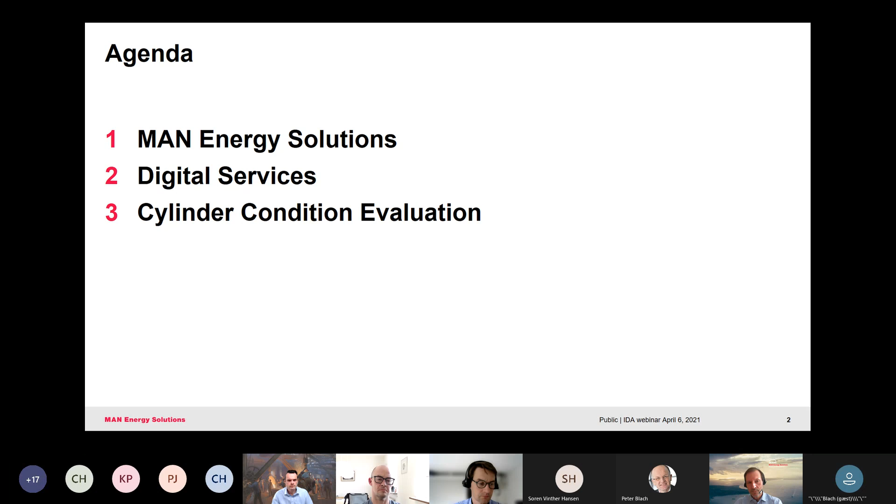A little bit about MAN for those who don't know us. We've been in the game of providing technology to the industry for more than 250 years. We're headquartered in Augsburg, Germany, and roughly 14,000 people are hired across 120 sites globally. Our products are divided into three main business areas, where we have the engines and the marine systems as the one where Jesper and I are representing here. Then we have the power plant business, and then the turbo machinery business, which delivers equipment for the process industry.

On the bottom part, we see just this.

To support all these three business units, we have the after sales brand, which is called MAN PrimeServ, which is the supporting part for all the activities with the equipment that these three business units put into the market.

Now, if we look at our company strategy, two of the 4 or 5 pillars we are building our company strategy on are decarbonization and digitalization. These are, you can say, the new additions to the strategy over the last 5 years.

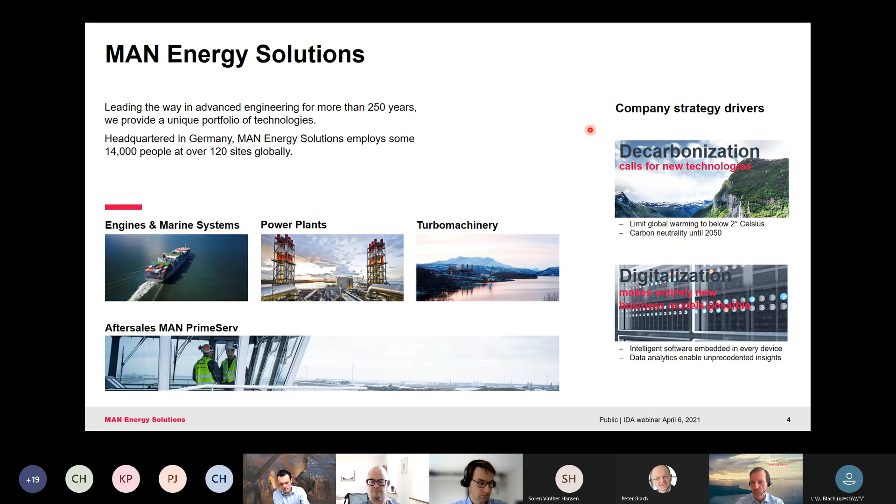A little map here, a lot of stuff is going on, but we are trying to explain what is going on in the maintenance journey that a typical ship owner or plant operator will experience in the lifetime of running some equipment. And it goes like this: there is a kind of problem or issue with the equipment on board a vessel, for instance, a problem with the engine.

Somebody detects that there is such a problem occurring. Then you need to issue some kind of notification to get to some people to actually figure out what the problem is, and then start an investigation into how we should actually solve that problem, and then advise some kind of action.

And then in step 5, our customer is able to prepare what kind of overhaul should happen on board the vessel, and then in the end make a report and a sign off when the problem has been fixed.

The service that we are talking about, the MAN PrimeServ Assist service, covers everything from when an issue is detected until we have advised the customer with an action.

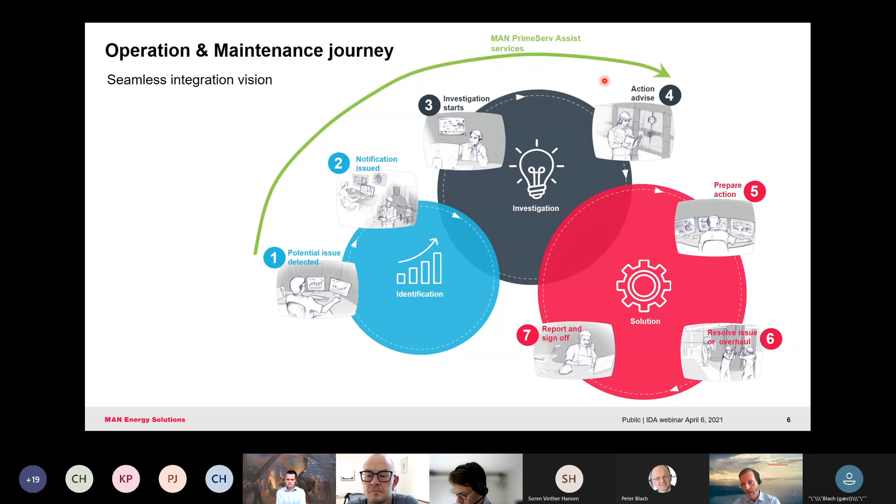The PrimeServ Assist service solution consists of 3 elements. We have the data infrastructure, which is the MAN CEON platform and subsequent user interface. Then we have some analytical tools that run on this in the cloud, which means some algorithms and machine learning. And last but not least, the human expertise, because it's not about big data.

It's about the combination of big data and human expertise. So here, what we do is we throw in the many years of experience we have with MAN, with developing the products and then subsequently servicing them. And this we do now on a 24/7 basis. So the customers who actually sign up for this service will get monitored 24/7. So these 3 elements, the platform, the analytics, and the human expertise, make up the PrimeServ Assist service portfolio.

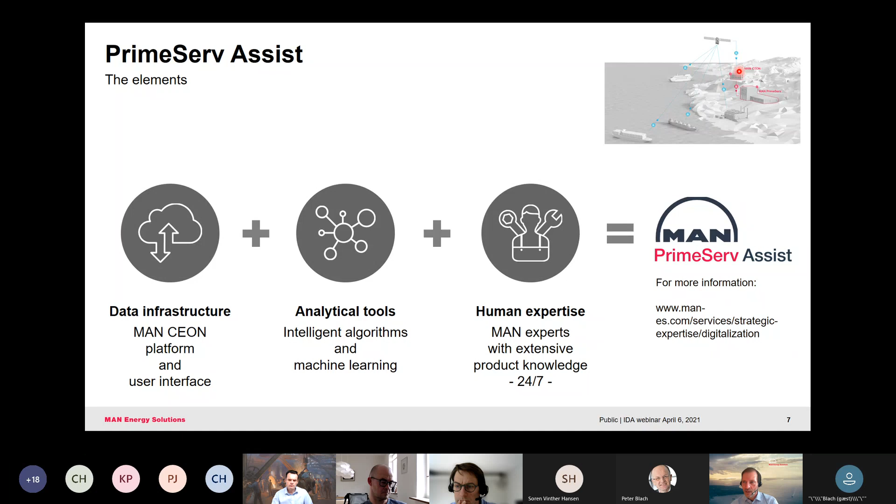There's a quick link here where you can find more information about that. Up in this corner, just a brief architectural overview, nothing much showing other than we are connecting the vessels via satellite to the cloud from where the data is accessible by MAN and by the customer and so forth.

Now, this service portfolio has 3 different focus areas. And the first focus area, and the main focus area as we could call it, is the availability focus. That is the day-to-day optimization of equipment health. And this part here relies 100% on sensor data, meaning sensors sitting on the engine in the vessel and then transmitted to the cloud.

The service will deliver monitoring and evaluation and subsequently advice on how to run the equipment and also how to judge the condition, for instance, the engine balance and if the settings are done correctly.

Now, the second focus area is on efficiency. This is a long-term optimization of power, emissions, consumptions, you name it, and again driven by sensor data. We can say it's the in-depth over time trending across systems, across fleets, and so on.

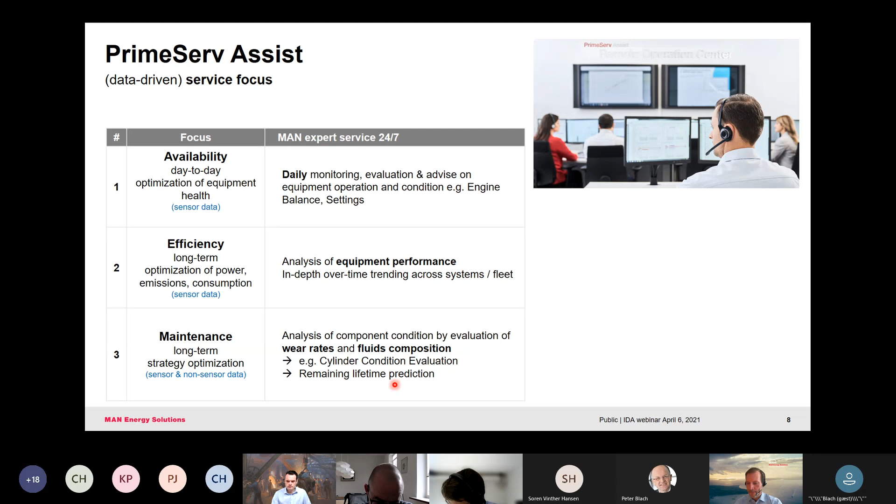Speaking about our goal, we can say we're solving customer problems. Right now we see a lot of environmental regulations pushing the industry for changes.

We see the shift from heavy fuel oil to very low sulfur fuels, combined with a new breed of high-performing, very efficient engine designs. These require much closer monitoring and much more technical knowledge to avoid unintended wear.

This wear often results in unplanned maintenance, and the larger the engine, the larger the problem, especially in terms of money. So at MAN, we are trying to create a proactive service that helps customers and operators reduce unplanned maintenance and keep their vessels available for the market.

We know that on board the vessel there is a tendency toward lacking knowledge on how to operate the engine. As explained, this can lead to damage to engines, unscheduled maintenance, high maintenance costs, and so on. It all calls for a solution.

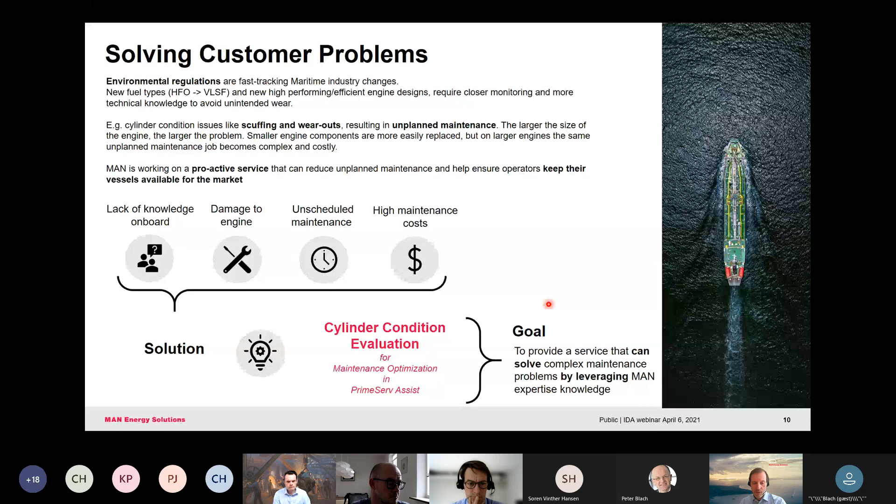In this case, the cylinder condition evaluation is our take at it. Our goal is simply to provide a service that can solve these very complex maintenance problems by leveraging the knowledge from our engineers.

My final slide here is to say, how will this service actually work? If we start in the upper right-hand corner, we have a customer who has signed up for this service. This customer will be alerted to take oil samples, wear measurements, or other types of observations.

When that kind of data is sampled and acquired, it will be uploaded into the CEON platform by the customer. It won't just be hand-typed into the database or cloud — we can also upload complete lab reports and so on.

Once it's in the platform, the algorithm together with the experts will review it and provide the customer with a status on how that drain oil or lube oil actually performed, along with advice giving meaningful insight into the problem.

The service doesn't stop there, because we can give plenty of advice to the customer, but if it's not understood clearly and not followed up by the crew, it's practically useless for the ship owner in the end. So we follow up by looking at the sensor data to see whether things have actually been followed.

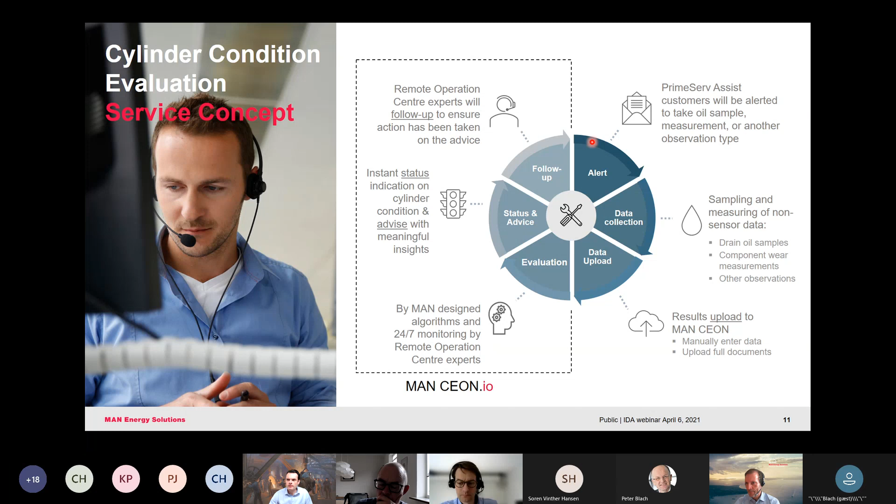Yep, I will take over the screen. Here we go — hope you're all seeing a different slide deck now. It's looking good. Yes, Jesper, thank you. Good, perfect. Then I will continue from here.

Thank you. As mentioned, my name is Jesper Mark Petersen. I am head of the cylinder condition group in the operation department in Copenhagen. That means in the operation department we take care of warranty on our newer engines, and extended warranties of the still pretty new engines.

We also do the R&D testing of new components, and we evaluate cylinder oil performance in general, as well as the issues at hand that need to be addressed for our future engines. So we are in the daily business in touch with whatever issues come up.

For this, we of course advise internally both instruction book departments, tooling, and other aspects that need to be addressed.

There is a lot of know-how involved in doing this. I've been dealing with it for 18 years, just with the cylinder condition, and we are still learning, still discovering new things. But there's definitely a lot that could be put into advices or into more intelligent aspects, and that's kind of the vision behind this.

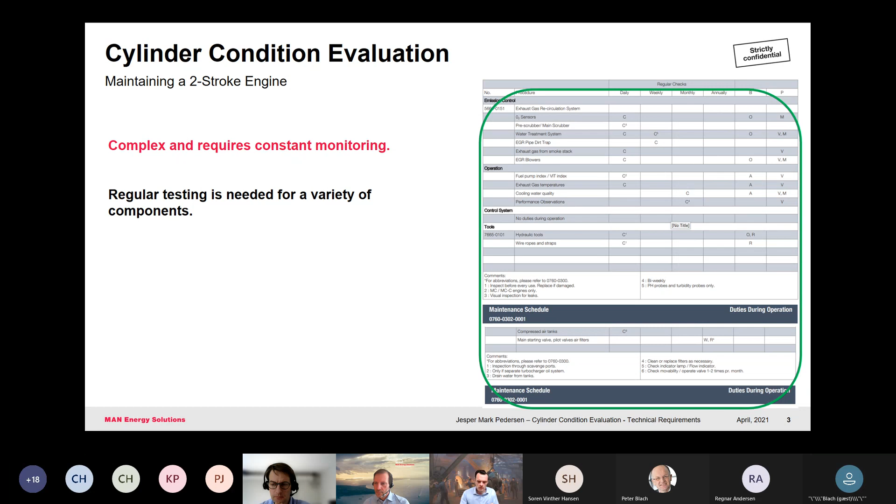The vision is that a lot of this knowledge data that we collect, for two-stroke engine advice and also for four-strokes, a lot of inspection is done in port, like scavenge port inspections and spare inspections. There is always a lot to do to maintain the engine, and these aspects are usually dealt with through crew experience or crew knowledge, with some guidelines from our side. That's one aspect not yet addressed in digital solutions, but it's what we want to combine into this feature with cylinder condition evaluation in maintenance.

So how do you do this? We have, as I said, a lot of instruction from our side. You've probably seen our instruction books and tables for monitoring. In addition, there are other features usually taken care of by oil companies, giving instructions on chemical composition of lube oils. How do you couple these things together? That's the big trick we want to assist operators in doing.

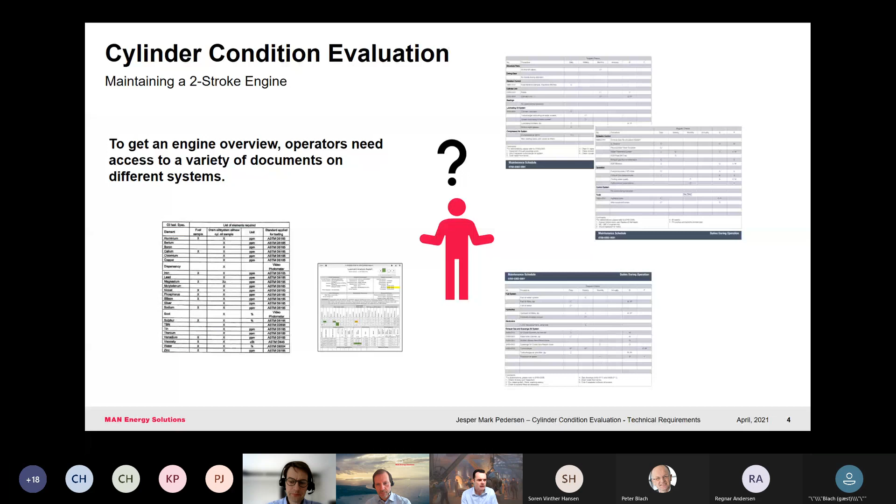For a given vessel, there will be issues related to the engine sets on the ship—could be auxiliary engines or the main engine—and in those aspects there could be connectivity aspects, drain oil aspects, maintenance aspects, or performance aspects. These could be put into categories to give an easy overview for operators to get fast and efficient transparency of how the fleet is doing.

So having this broad overview relies, of course, on the algorithms we have in the background to evaluate the data, which comes partly from sensors and partly from the crew itself when they're reporting their observations.

That aspect will assist superintendents and fleet managers ashore, but it will also have the possibility of going more in depth—looking at the SDA for a given engine, or running hours for individual cylinders on the main engine, looking at overall history to see how that single unit is actually doing.

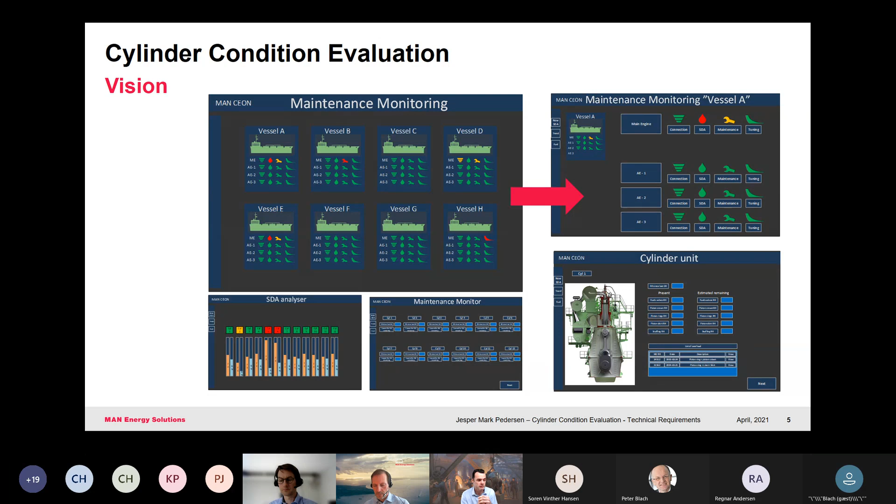An example here could be drain oil, which isn't overseen, but is something we use. We give minor guidance on drain oil values, but we don't give a complete overview of the different threshold values and their dependencies on different aspects. We have a lot of in-house knowledge—we've been using drain oil analysis for the past 20 years for R&D purposes, and we also use it quite a lot for warranty troubleshooting. So this is something we have a lot of in-house technology to assess.

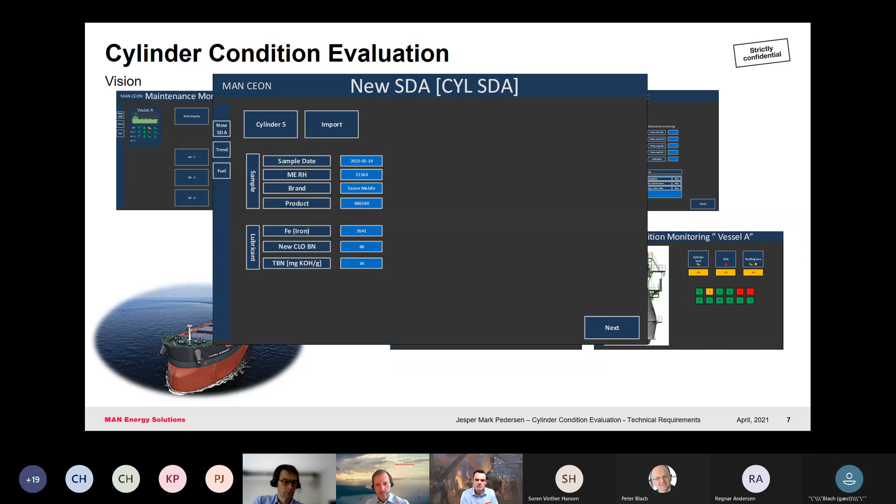The trick here is to bring it into a template where it will be feasible for the engine crew, so they can enter a simple set of data, and based on that entry, give them a timely alert with instructions on what to do next, how to prevent this from accelerating beyond their control.

We've had numerous cases with cold corrosion where the crew have been alerted by drain oil analysis from the oil companies. There were clear indications that the engine was going astray and that wear would go out of control, but still they do not react until they have broken piston rings. By then there's accelerated wear of liners of 1 to 2 millimeters or more, ending up with a loss of lifetime, more than halving the lifetime of the components, which is not to anybody's satisfaction.

We want to be more proactive and prevent this from happening in the future. We can do that by obtaining the service observations from the crew and linking it to our own guidelines and our own knowledge database.

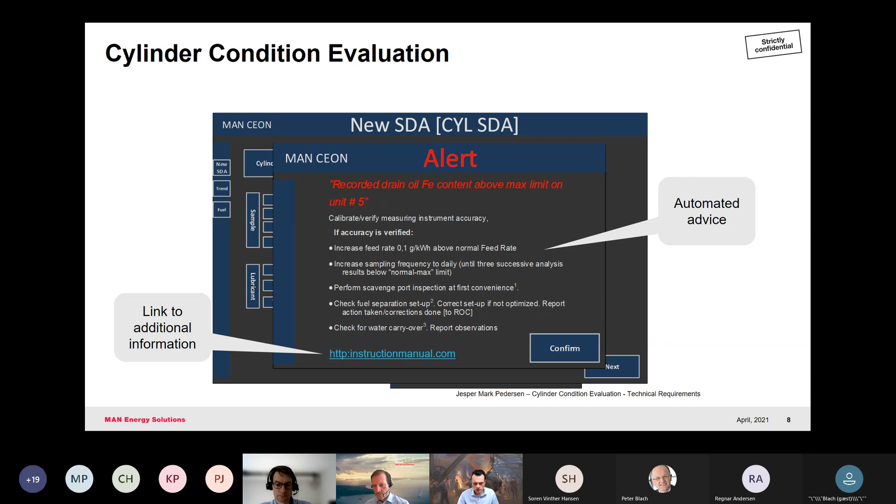This would rest on a number of cases. At the moment we are trying to mind-pick all our experts and put it into paper. What should be the thresholds? What are the conditions? What are the connections between copper, chrome, iron values? How do you link this to running hours, etc.? So getting all this knowledge in place, there could be repeats of certain events we need to include. Once we have the basics in, this is what we will do first.

Then we will work into machine learning, where we can collect the data coming from the ships, and by that we'll be able to give even better advice, based on our knowledge of how these things actually correspond to each other.

We'll be able to put that into a more intelligent way of looking at engine performance and component lifetime. It would be possible to advise on premature replacement of fuel valves, because we could see an influence, for example, on cylinder condition, meaning you could give more running hours on your piston rings because you don't subject them to a faulty fuel valve. That kind of knowledge we would put into the system to prevent these cases from happening.

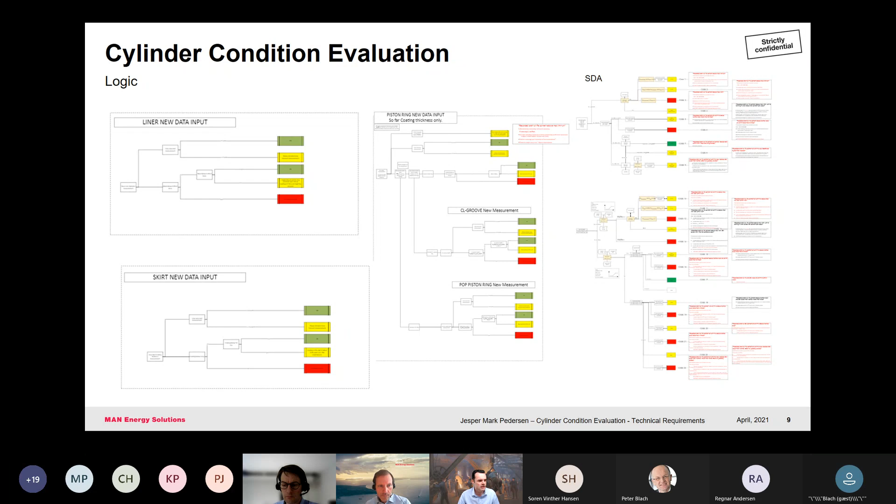That would be a benefit on our side, to take these cases based on this logic and turn it into advice for the engine crew. There's a target here, both from PrimeServ for service, but also from our point of view on warranty. There's a big advantage in having the best performance of the engines.

At the moment, as Henrik explained, we have a scheme of connecting the vessels - collecting sensor data from the engine, bringing it into the cloud, and from there into the ROC, where we can give advice and follow the engine trends. We can run some basic trends and some algorithms at the moment, where we can alert when certain things are happening on the engine.

It's not proactive at the moment. We can see the condition and give advice based on that. That's where a lot of the focus has been - looking at engine performance, looking at the sensors, and putting that in there.

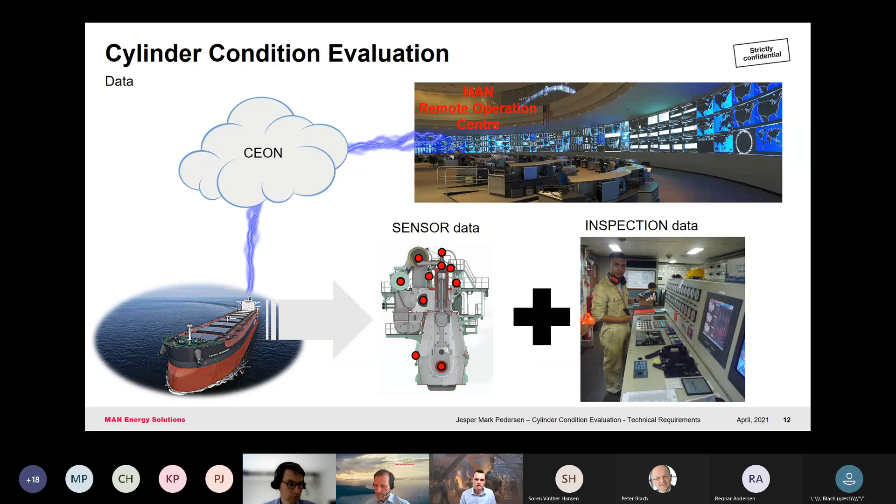What we want to do is couple this to the inspection data we have from the crew. The only way to get a complete picture or complete overview of the engine condition is to have both the sensor data and the inspection data.

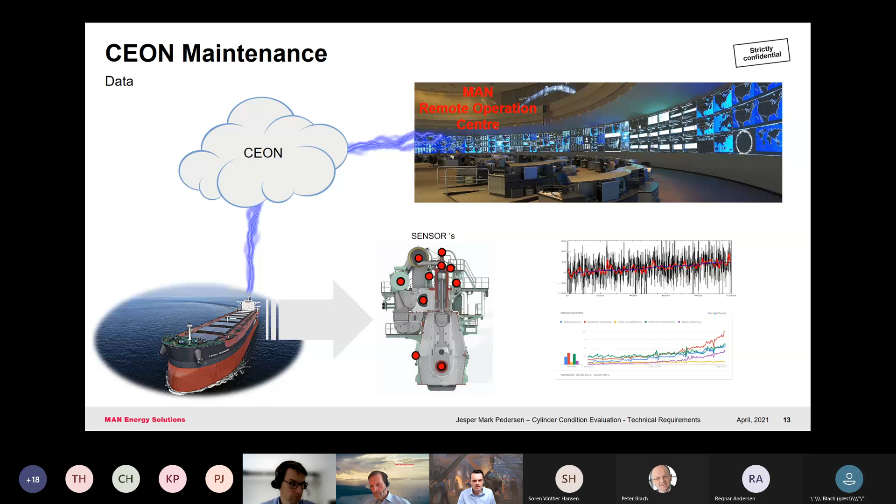It's not easy, as the sensor data is time-linked, running fluently based on a clock hour, whereas the manual data we receive from our superintendents or the engine crew is usually in relation to the main engine running hours - it's a timestamp. So you have sensor data running fluently and continuously, but then you have these pictures and momentary snapshots from the port stage of the condition, and you need to link these things together to be able to predict what's actually happening.

You have to be able to see the last state and condition of the engine, and then try to decipher the sensor data from that.

Linking these two things together sounds probably pretty easy, but in reality it's not that simple at all, to be able to have a prehistoric, let's say, event, and then link that to the present situation coming from the engine.

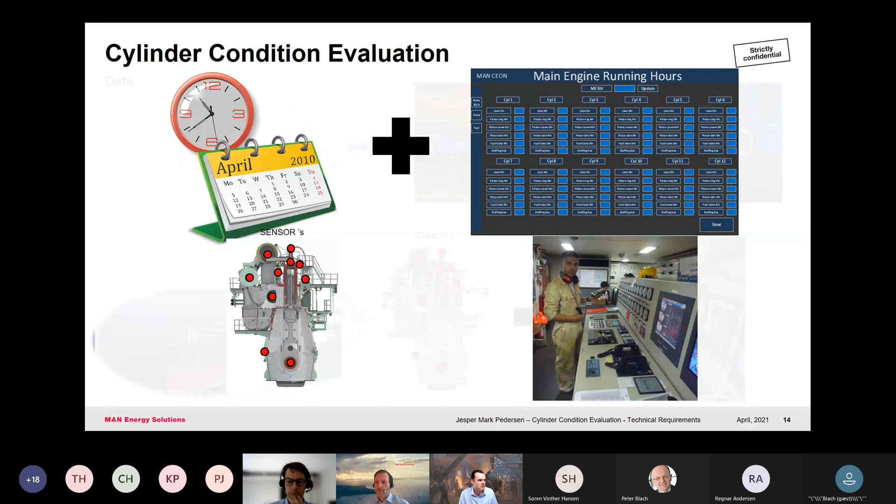One assistance in doing that is doing what we call the drain oil analysis. This has not been part of our instruction book so far. It's something we are guiding against, especially when running high sulfur fuels. But taking a sample of drain oil, to explain a little more on that, the drain oil is the leftover cylinder oil once it has been utilized. We have two lubrication systems on the engine, one being the system oil, used for bearing lubrication, piston cooling, etc.

And then we have the cylinder oil, which is a one flow system. You don't reuse it. It's injected for lubrication, but also a lot for neutralization and detergency purposes into the piston rings. From there it's utilized to keep all components free moving, but also to react, to neutralize. Taking this drain oil, the used oil, and having it analyzed for salts and iron values, this gives us good knowledge of how the engine is actually running, how the tribology is working. It also gives us insight into other aspects.

So we can see if there are, for example, seawater coming in, or system oil causing dilution. There's a lot of aspects. There's vanadium. There's a lot of things that we can read from this sample, similar to taking a blood sample from a human, where you can also see a lot of different values, and linking them correctly together, you can diagnose people with different diseases. There's a similar pattern when we look at drain oils.

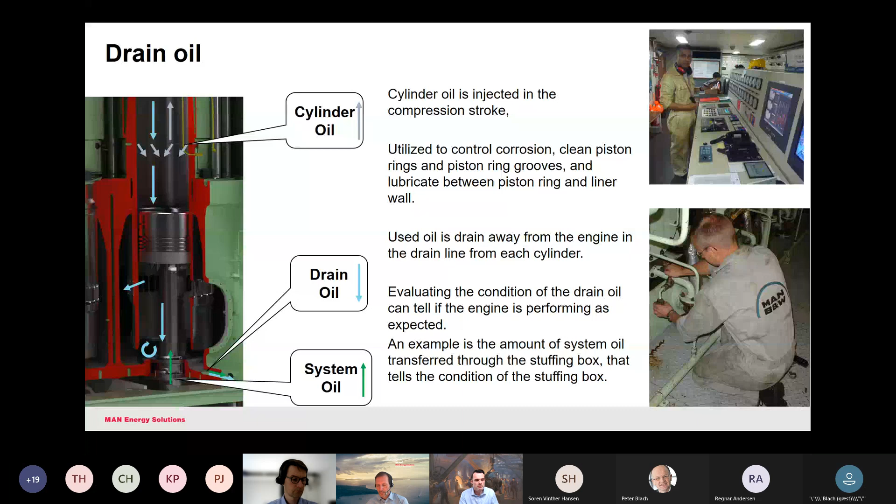As mentioned, you also need the inspection insights from the crew, and this is the trick, to be able to collect the manual observations, initially collecting the measurements that can be done, trying to specify as much as possible a measurement the crew can perform during inspection, coating thicknesses, clearances, collecting all of this to get this overview of the engine state.

And on a future aspect, how do we couple photo material, for example? We are looking at that also. We want to be able to learn from the visual impression of a piston ring. It may not be something you can see from the measurement of coating. You cannot see it from the drain oil, but by looking at the surfaces, looking at fatigues and cracks and burn marks, looking at deposits building up on the ring lands, these are clues that we need for the puzzle.

This is what we will be building in the future, to collect more clues and put all of this together. That will bring us to a place where we can actually give a lot of good advice.

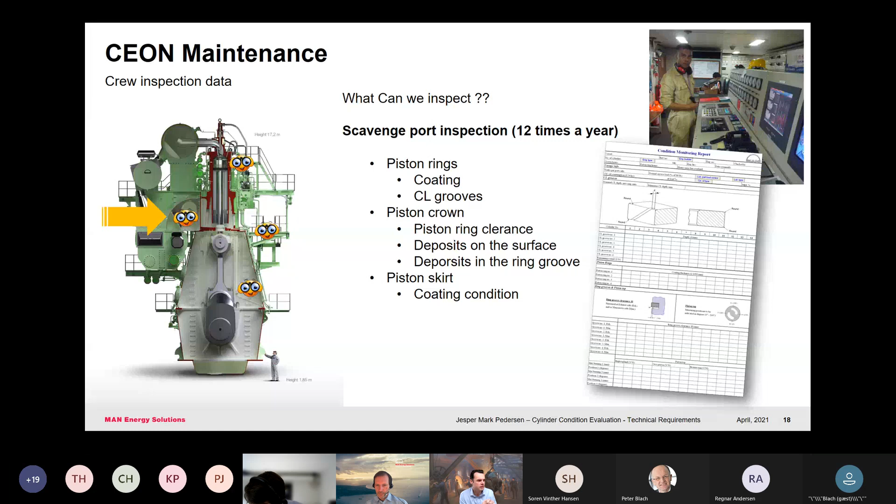Last slide I have is to say that there is always a concern of reliability of data. Sensor data is very trustworthy because you could say you have calibrated sensors, giving reliable feedback. Whenever you link in a person to collect a measurement, you always run the risk that this person is perhaps misinterpreting, misreading, or simply not capable of taking a simple measurement, and that could end up with some kind of misconclusion to what actually is the engine state.

So this is also part of our package and our aspect. We want to build it. Firstly, we need to put the logic into our computer system so we can deal with it and conclude from it. Second, we need to secure the data flow, and we are working on a mobile platform, so that if we can have the inspection done inside the engine on a mobile app, we can also secure that the data seems correct, and confront the person inspecting in real time, asking whether he believes this is correct, whether the measurement is correct, because we can do a validation check, not after the inspection, but during the inspection.

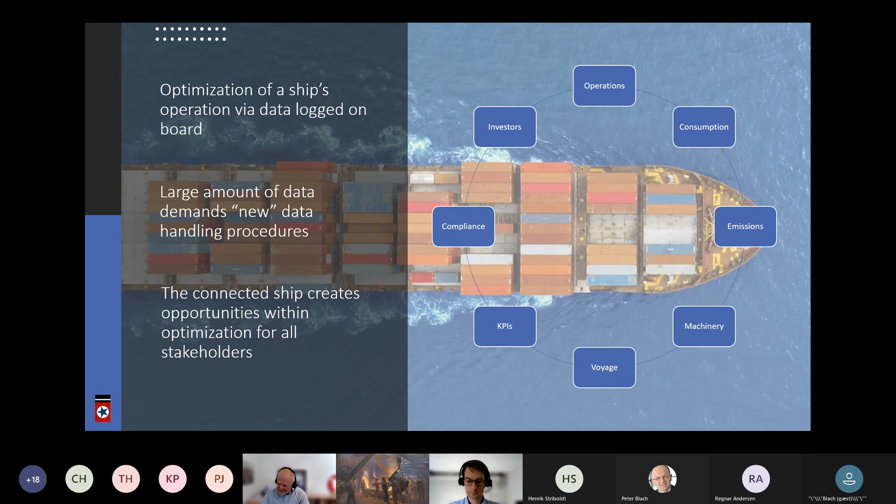And there are a lot of stakeholders that are interested in how the vessels operate, for example from a maintenance perspective, but also from an operational and commercial perspective, and especially with the latest developments on the compliance side, there'll be a lot of compliance-related subjects where operational data will go in. So an optimized vessel is a key, has always been a key, but is even more a key in the future. So it's a little bit about seeing the vessel as a whole.

So my name is Søren Vinther Hansen. I'm an independent consultant working out of Svendborg. I have a performance company, and I do consultancy for the shipping industry on performance issues. And I have developed a piece of software to handle all the issues that I get from ship owners and operators.

I'm a naval architect and a master mariner. So I sailed for many years, unfortunately for you engineers, in the wrong end of the vessel. But I sailed there for around 15, 20 years, and then I went ashore, and then I started to become a naval architect. And then I got a PhD from DTU.

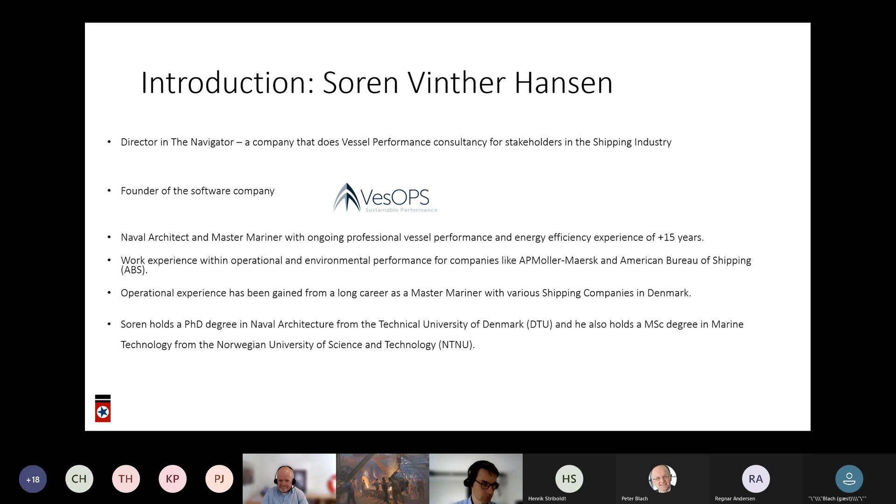And I've been working with performance and data. I started with AP Møller Mærsk, and I've been around different companies, setting up systems, doing performance analysis for different companies. So operational data.

So now we heard about all the sensors that are placed in a vessel, and we have gone from manual reporting to automated reporting. And of course, there's still, as we also heard before, a use for the manual report. There's still a use for the eyes on board the vessel.

And a lot of those can be used for the various purposes that the stakeholders are interested in. So combining that with the crew on board, the crew's knowledge, and the crew's being on board and being close to the equipment, that's of high value, and that's something that should be investigated more, I think.

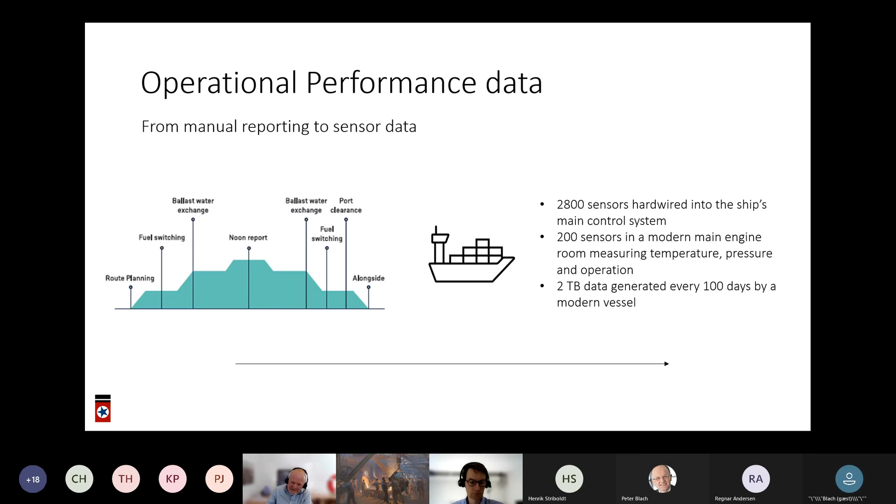If we're looking at the optimization side of it, of course, a ship owner is interested in being able to sail the next day, so being able to operate the vessel. But you can look at different ways of operating the vessel. You can look at operating in the most efficient way, and depending on the purpose or the perspective that you have for what's the most efficient way, there can be some clashes in between, for technical performance versus operational performance.

So the technical guys are interested in maintaining the vessel the best way, and the operational guys are interested in maximizing the profits. So the clash between what's the most efficient way of operating a vessel is often there, and that could be an issue.

If you're sailing with very old vessels, and there's still many old vessels in the market, you might be interested in retrofitting the vessel to operate it more efficiently. So you could look at propulsion optimization, machinery optimization, and ESDs, and increase the volume and the cargo. And of course, you can go for more new vessels and more energy efficient vessels when you go for new builds.

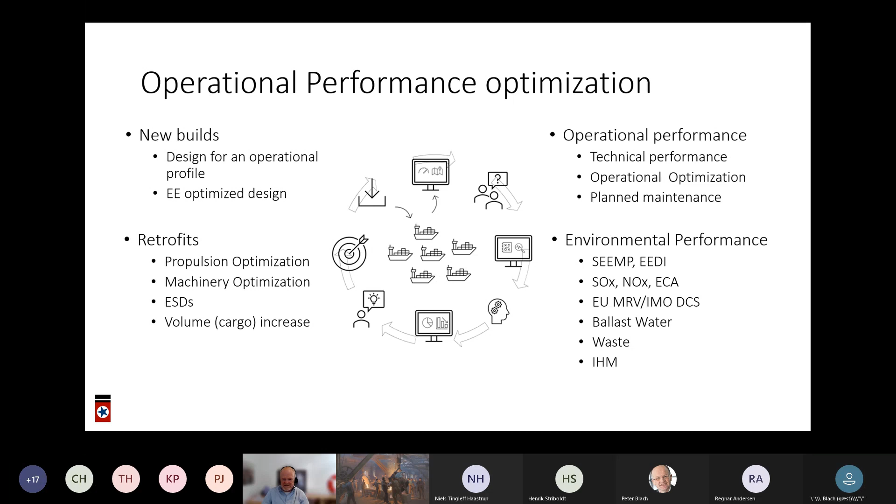And then there's all the other issues or compliance and regulatory aspects that you have to take into consideration. So data can be utilized in many ways and can be utilized for operational optimization in many ways.

We saw the connected vessel before. So if you look at a vessel with all the sensors and its equipment, of course, the data is collected in the vessel and it's available for the vessel's crew, and they can look at the data, and then they get alerts if there's something wrong, and this is the way they operate the vessel by interpreting the data.

The data can be sent for sure, as we also saw, for example, to land, and then they can interpret the data either by getting all the data or by getting a sample of the data, or even go on board and log into the systems out on board. So I've seen many systems where you can go in and look at what they see in the engine room, what they see on the bridge. You can see the radar picture, you can see whatever from a remote installation.

And you can also have all your data sent to shore. But basically, what you should aim for is to have the valuable data sent to shore, and then the rest of the data should just remain on board if it's not necessary for the analysis that you're looking for.

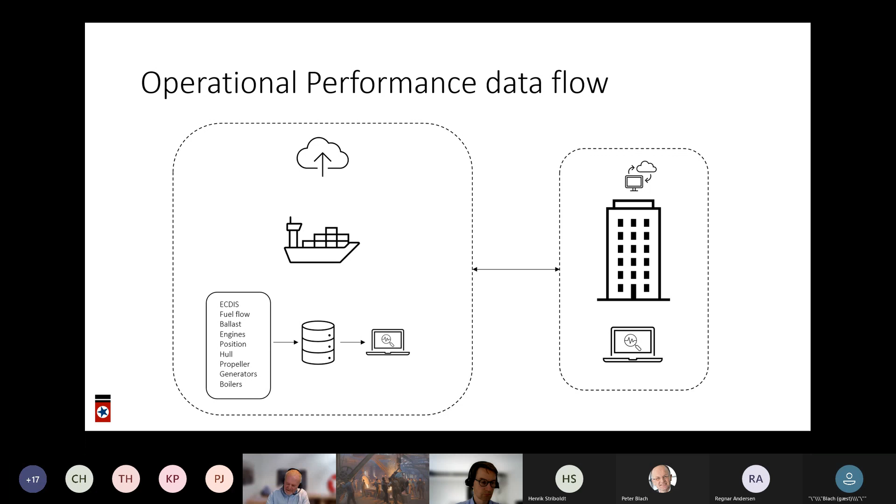So you have to be able to define your analysis and then define the data that you're looking for. Basically, if you're looking at maintenance, the state of an item or device on board, or even the whole vessel, then you need some design data to define a baseline, because a baseline tells you what you should expect for this component or for this vessel.

So some design data to define the component's baseline is one thing. The other thing is the sensor data, the operational data when you operate the component or vessel, and then some manual reporting of what you can't do with the sensor. And sometimes you would put some third-party data into the loop also - for weather, for example, you can get that from a third-party provider, or position data from AIS providers and so on.

And all the data that you collect, you put it in what you call a data lake. The data lake is basically the container for all the data. Some of it you would need, and some of it you just say, okay, I have the data, but I don't need it for the analysis I want to take.

So you put it up in a data warehouse, you define the analysis that you're looking for, and then you take the data that your baseline defines that you need, and you bring it up to the warehouse. Then you do the analysis module on top of your data in the data warehouse, and then you make a presentation layer.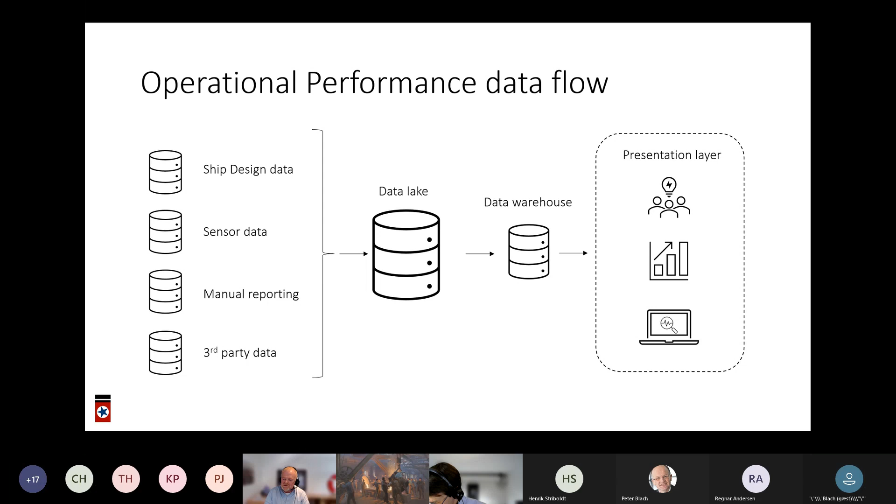And of course, the interest here is to make a presentation layer that gives meaning to the one who is using it. So a lot of data coming in a data feed, that's interesting, but does it give any meaning to the end user? There's a lot of data, a lot of measurements, a lot of time series that you can look at, but does it give any meaning for you when you look at them?

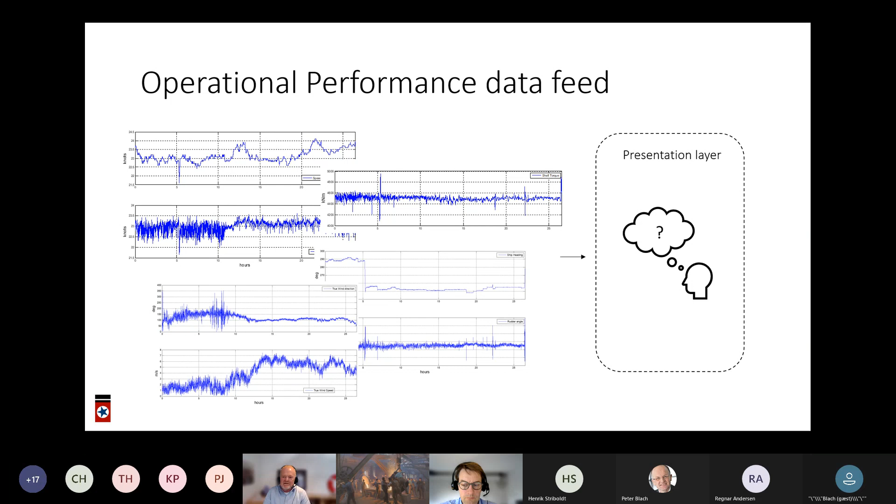And by the way, are they correct, because they are sensor data? Is there anything wrong with the sensor? Does the sensor need calibration? Or can you count on the data that you get from the sensor? So you need to do some sort of data validation before you start doing the data analysis.

So the combination between internal and external systems - you need to set up baselines for that. What's the baseline? What's the impact if the wave is 2 meters from forward, or 4 meters from forward? What's the impact on the operations of the systems inside the vessel?

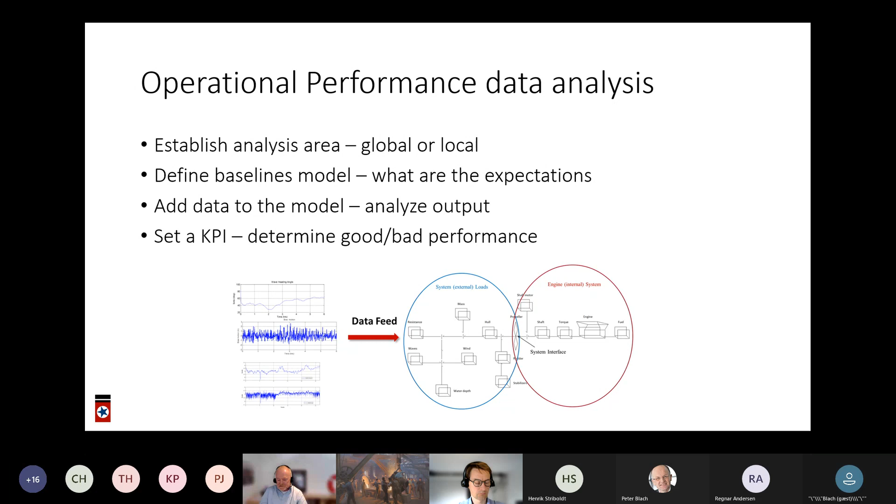So there's no man in the loop - there's only sensor data. So how do you know the data you're getting is the right data? One thing you can do is set up sensor dependencies - which sensors are related to other sensors.

So you can set up the sensor relations in a sensor fusion process, and you can use the sensor fusion to detect outliers and errors, for example, because you know that a couple of sensors, or a set of sensors, are connected in a certain way.

And if one sensor is off, you can get a warning or alert because it doesn't match what the other sensors are doing. Let's say you have a torque meter with torque measurements on your propeller shaft, then sometimes you need to calibrate that. Sometimes there's slow drifting on the torque meter, so how do you know that? You need to set up some relations and do what we call a sensor fusion process.

You can also use sensor fusion to replace unreliable parameters. Let's say a sensor is showing an error for a while, it's broken or needs replacement. If you know the relation between all the other sensors, you can have expected values to replace the broken sensor until it gets fixed. So data quality is really something you need to include in your analysis and evaluation of the vessel's performance.

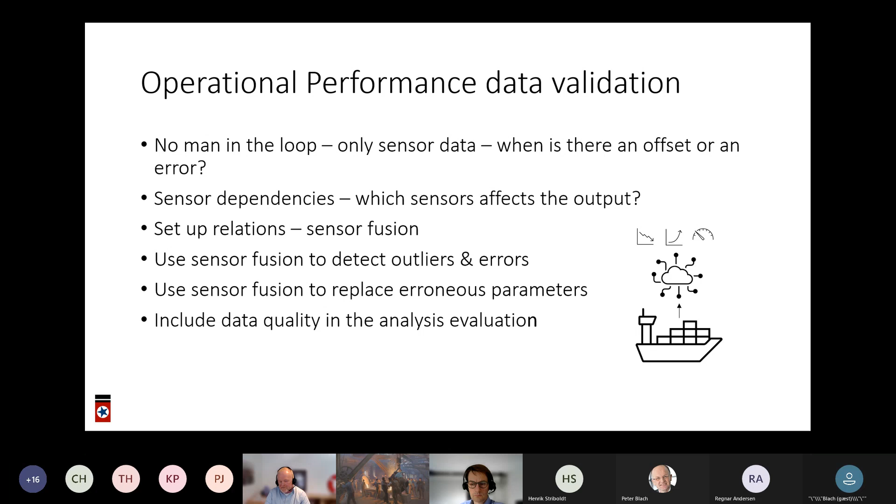And if you use the relation between speed, power, and fuel oil consumption, but use a different speed than you really sail with your vessel, then you get an offset in the analysis value you're getting, and you can't count on the analysis. So you have to be aware there are some calibration issues.

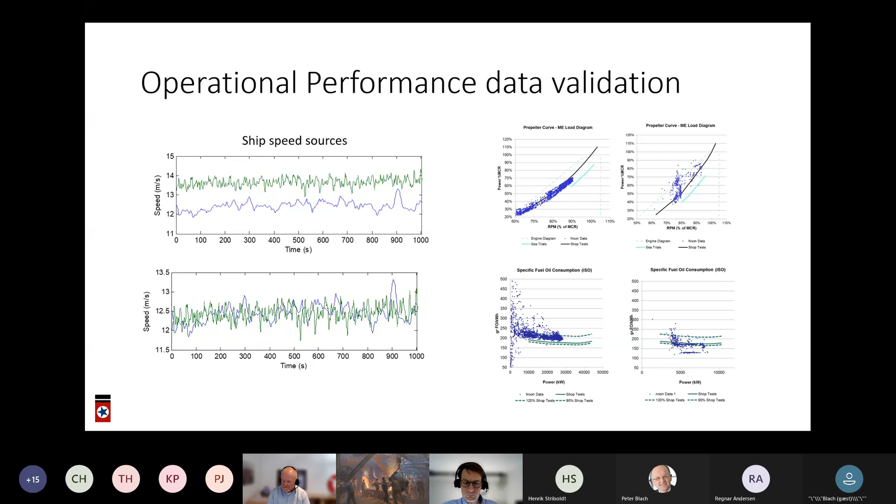You can also apply techniques like machine learning and artificial intelligence that we heard about before, and that's not something widely used in the shipping sector yet. It's something everybody is talking about, but when it comes to it, it's very simple analysis going on. But with the amount of data we get from sensors, it's obvious to use these techniques for analysis, and also for fault detection and error analysis. So that's one thing to keep in mind.

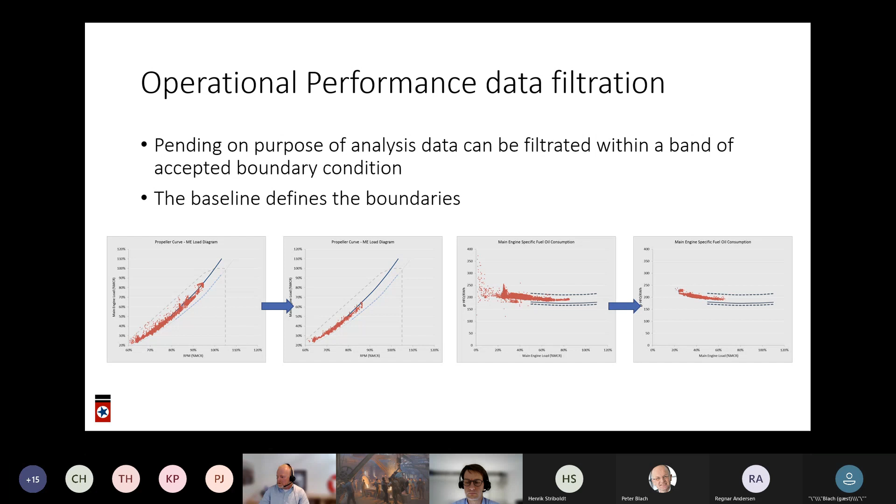We saw this nice presentation about cylinders, and when I heard MAN was coming, I was thinking I shouldn't take any analysis examples, but I've taken one anyway, and we can look at that if it makes sense. But generally, what you want to have, because the main engine is consuming the fuel - that's where most of the money goes.

So the bunker goes to the main engine, most of the bunker. And of course, you want a well-functioning main engine. You want the optimal SFOC, you want it to run at optimum conditions. And of course, you need to know how is that - how is the flow in the main engine, the airflow, the fuel flow, the pressures, and the temperatures.

If you're looking at the performance of a main engine, there's online data and electronic control engines. But if we're going before 2015, for example, the engines delivered in vessels - and there's probably 15,000 vessels sailing around with these main engines - they don't have the ability to do electronic checks and connect to different fault detection systems. So you have to do it a little bit differently.

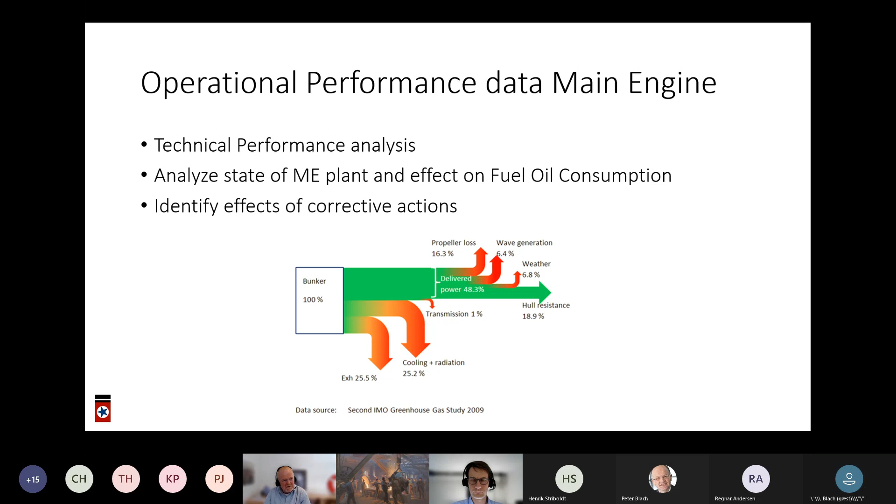I was contacted by a guy who had a failure, an overhaul on the main engine. It was quite costly and wasn't planned for them. He was an operator with his vessels in technical management at an external company. He gave us a lot of data and asked if we could see anything on the main engine performance data, because they do main engine performance tests every month in all vessels. You go up in load on your main engine, do all the measurements, and then analyze the data. So we got all this data and tried to do an analysis with the means we have.

We looked at different pressures and set up some indexes - for Pmax, the compression pressure, and the scavenging pressure. This says something about the moving parts, the pressure in the engine, and also the airflow over the engine. If you set up a relation between these, with your baseline as the shop test, then you can define what's the good area and what's the not-so-good area.

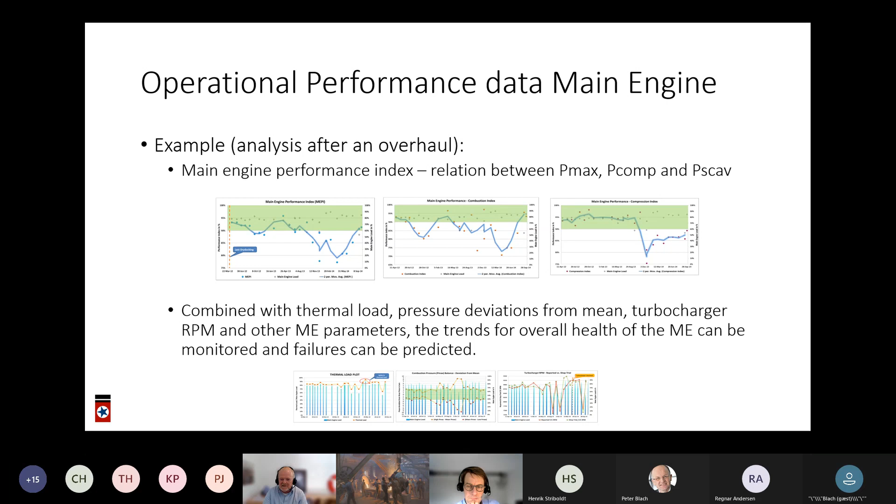If you look at one number, it might not give you the answer you're looking for. But if you combine the number in relation with other sensor data - now, this is not sensor data, it's manually reported data - but if you do that, it's possible to see a pattern if something is on the road to failure. So that was just an example.

All these vessels from before 2015 have these engines, and there's something they can do to make them run more efficiently - there are some suggestions here from MAN, for example. One of the things we've been looking at is the diameter of the propeller and the RPM of the engine. If you look at Japanese bulk carrier builders, they haven't changed the hull design since 2005 or so. A Kamsarmax from Oshima, for example, has had the same hull form since 2003.

But they changed the engine - to one with a low RPM - and increased the diameter on the propeller, and suddenly they gained 10% on fuel oil consumption, which is a lot. Then they did some modifications in the aft, putting swirls on rudder bulbs and so on, and got another 5%. They also changed the bulb - they have no bulb anymore. By doing these small modifications, even though they are expensive at the moment, you can gain a lot.

The derating given here as an example is connected very much to the diameter of the propeller and of course the lower RPM of the engine. And we saw lubrication is one thing - for older engines, auto tuning is another thing, for low load operations, which many vessels run. That means the design point they were designed for, they're running well below that. So you can do a lot on the improvement of the SFOC on a main engine if you're interested in it.

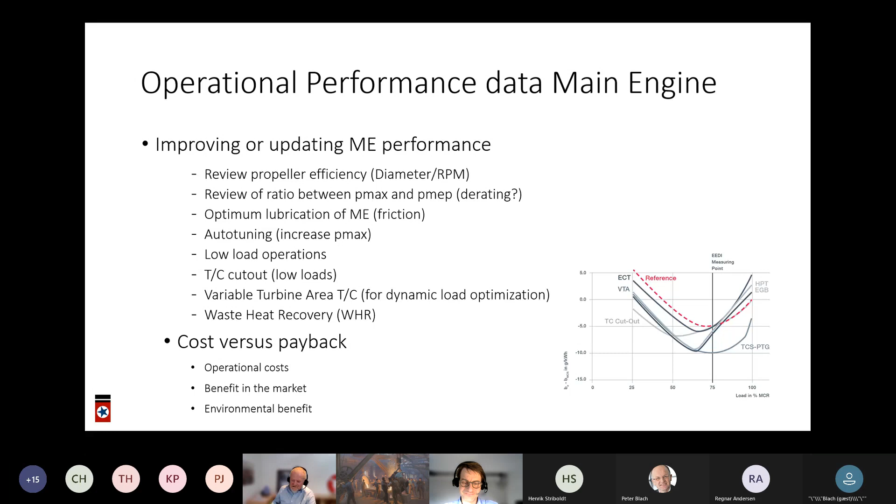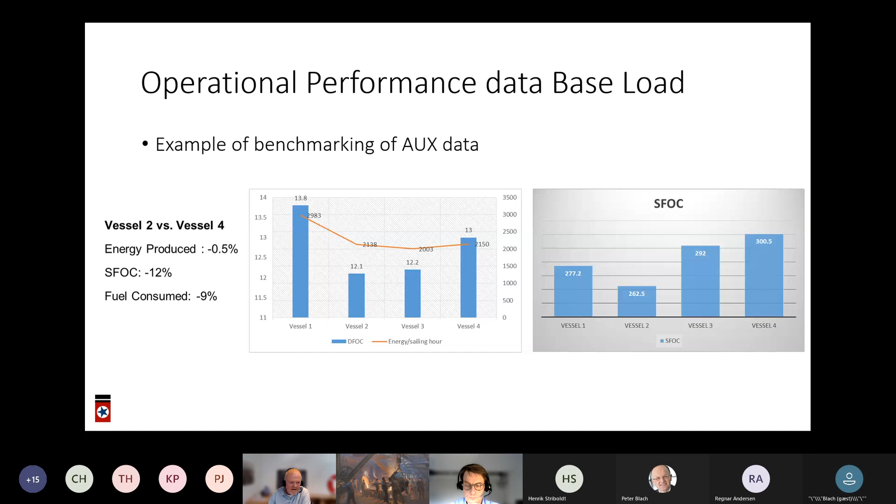There's an example here of optimal auxiliary operations for container vessels, where vessel number 2 is operating. It's generating almost the same power as vessel number 4, but there's a 10-12% difference in fuel oil consumption. So there's a lot to gain by looking at the operational aspects and how it's operated. If you can benchmark similar vessels, it's fairly easy to see where the outliers are and where they're not.

My time is almost up, so I'll jump ahead and go a little bit into the new regulations, because when we get close to 2023, we will see new regulations for vessels. Everybody has to comply with a certain target. If it's a pre-EEDI vessel, you have to comply and get issued an EEXI—that's an EEDI for an existing vessel. And there are CO2 emissions targets for 2030 that you have to be below. With the EEXI, if you calculate it for your vessels now, you can get a number and see how much less CO2 you have to emit by 2030.

So if you want to operate your vessels before or after 2030, you have to comply with these numbers, and there are different ways to do it. You can put an engine power limit in, limiting the power on your main engine. You can change your fuel to something else, do a retrofit to make your vessel more efficient, or build a new vessel. You'll probably see the EPL, engine power limit, installed on many vessels in the future—a limitation of power. Some vessels have to limit power by up to 50% or 60%, and some are steam turbine vessels that I don't think can operate in the market after 2030. So it has implications on the main engine.

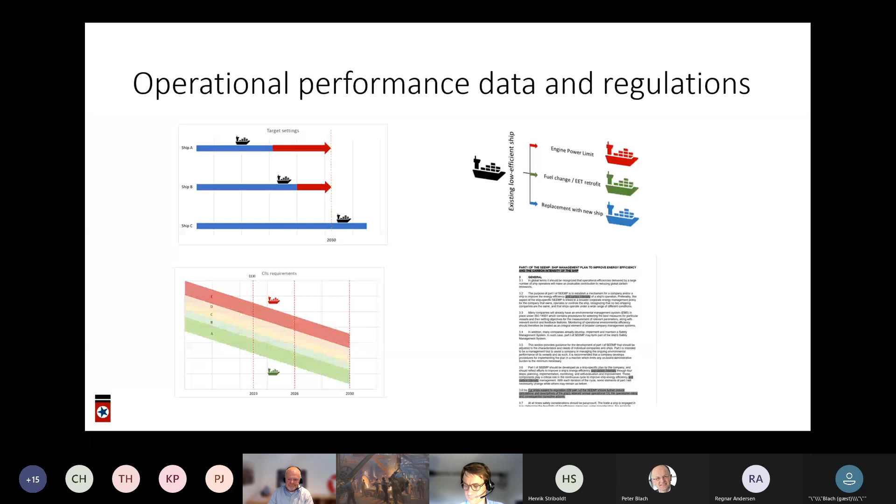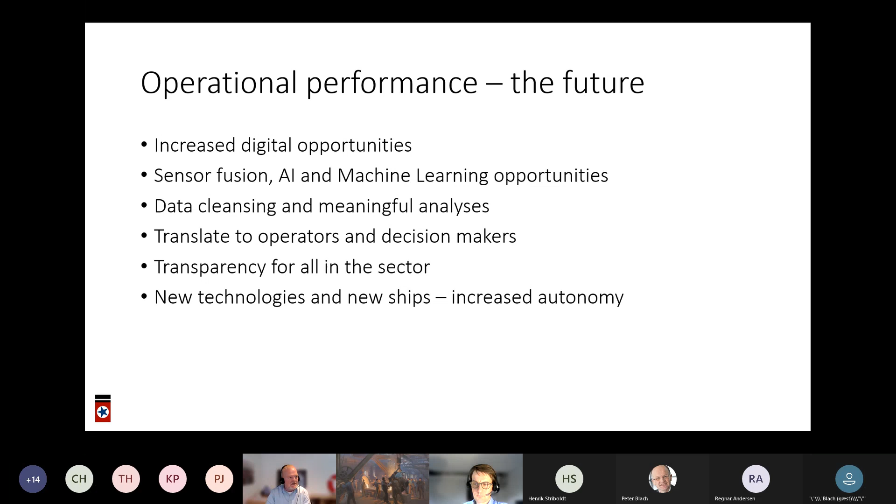And all this will probably also create increased autonomy in the future, because as we get sensor fusion and connected vessels, we'll probably see more of that. Thank you for your attention—that was my presentation.